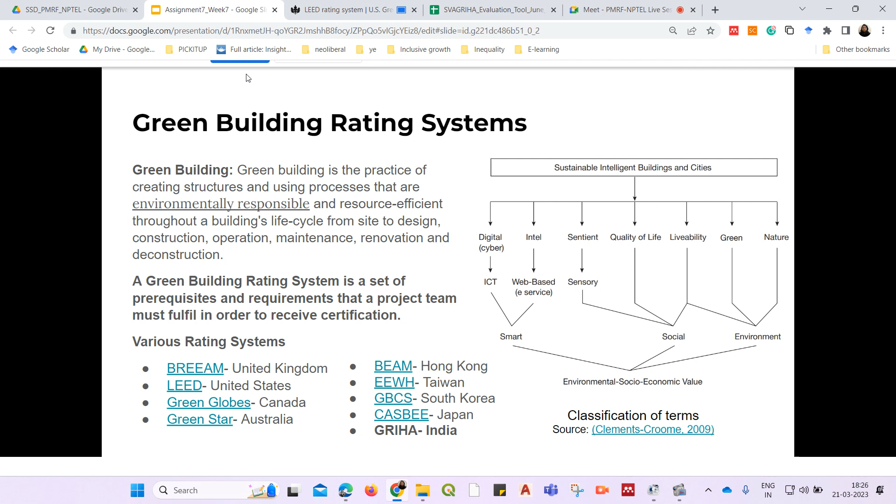Similarly, there is a link for Green Globes Canada, for Australia, Hong Kong, Taiwan, and other places which I have mentioned. Also, if you want to read more about how sustainability and different terms related to sustainability are classified, I have linked this classification of terms paper here, which is actually a book about intelligent buildings and how intelligent and energy efficient and different terms are classified. If you want to read more about that, you can go ahead and visit this link as well.

Okay, coming back. As I said, there are several different rating systems around the world used by different countries to suit their specific context. Today we are discussing, for this question, GRIHA, which is the Green Building Rating System for Indian context.

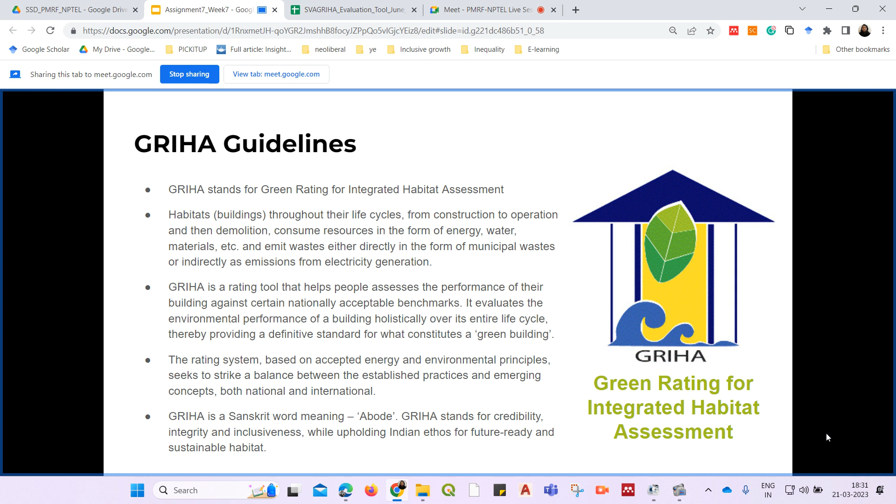Griha measures or evaluates the performance of a habitat, home, or building throughout its life cycle. It takes into account the different parts and components of that life cycle, and different components of the Griha rating, or indicators, correspond to different parts of the building's life cycle.

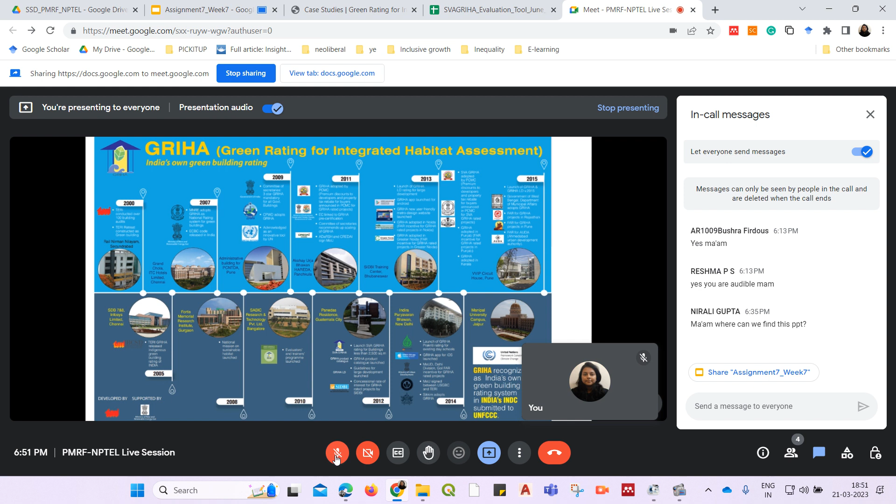Then the GRIHA project catalog was also launched, and guidelines for large development, even larger development, were also launched.

Then in 2019, the GRIHA LD rating for large development was also launched, and another app was also launched for Android, providing a more user-friendly way of interacting with the rating. A new website was also launched for GRIHA. The same year, GRIHA was adopted for FAR incentive generation in Noida and Greater Noida.

Then in 2014, GRIHA Prakriti rating was introduced for day schools, and an app for iOS was also launched. MOUD also provided incentives based on GRIHA rating for FAR in different projects. An MOU was also signed between USGBC and TERI for furthering GRIHA rating, and the state of Sikkim adopted GRIHA in 2014.

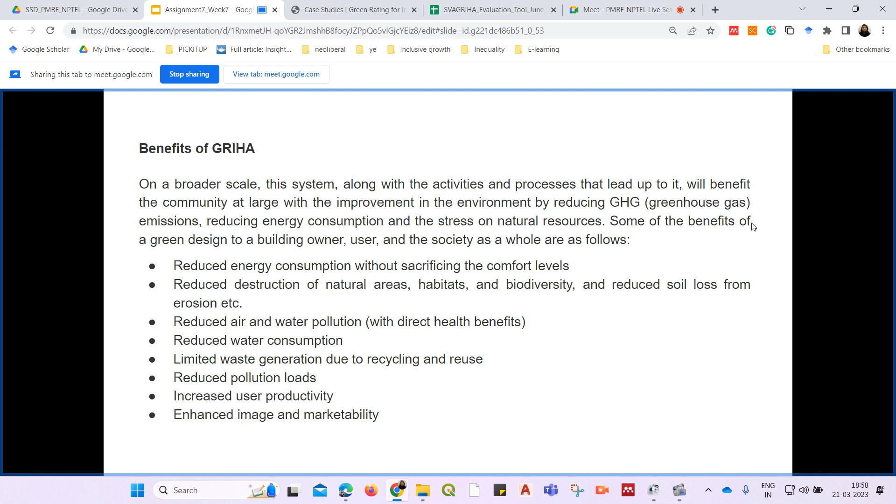I hope the background of GRIHA is clear, and we can move on to our question now. Coming back to the question, it was basically to analyze and score your residence as per the GRIHA guidelines. This is the link that was provided in the question.

This link takes you to the GRIHA checklists which are on their website. As you can see, there is a checklist for affordable housing, for existing buildings, and feasibility checklists — the latest 2019 one and the older one. Then there are self-evaluation checklists, checklists for day schools and for larger developments, one for SVAGRIHA which is the self-evaluation checklist, and then GRIHA for cities, which is a city self-evaluation checklist.

Since we are doing a small project for this example, not a larger project, we will follow the SVAGRIHA self-evaluation checklist, which was introduced for projects with a smaller built-up area or smaller site area compared to other projects. If you click this link, an Excel sheet will be downloaded which contains the checklist.

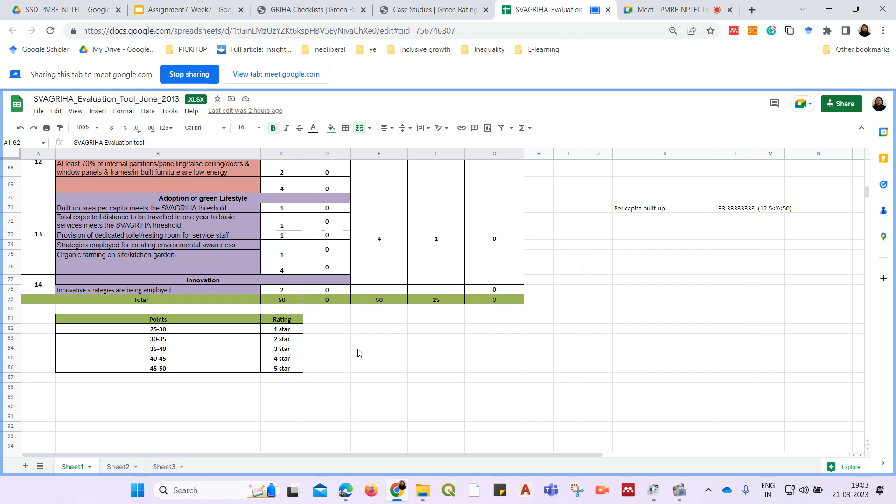So this is what the checklist will look like. I hope everyone can see. A checklist like this with the SVAGRIHA evaluation tool will be downloaded for you, and it will have different criteria. For every criteria the maximum points that can be awarded will be given, and category-wise point distribution will also be given. For each criteria, what is to be measured and how it is to be measured will be given.

Apart from this, another thing you need is the GRIHA manuals. I'll be sharing this Excel sheet with you, and I think it is already uploaded on the shared folder, so you can check that in your own time. But for now, let me just show you. This is the link for the GRIHA manuals which I have provided here.

If you just go on to the link, you will see different manuals which are there, like the manual for affordable housing, the existing building manual, the day school manual, and all such manuals are there. So we are working with the SVAGRIHA evaluation, so we'll open that manual for now. This is the SVAGRIHA manual.

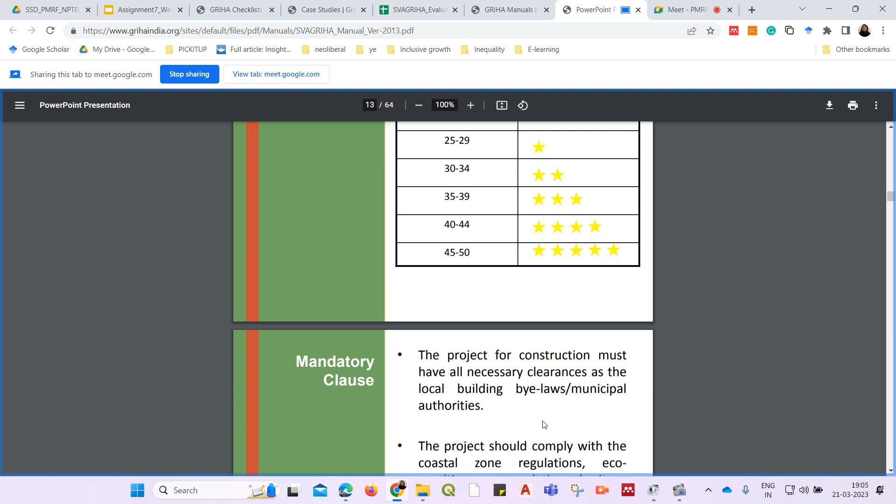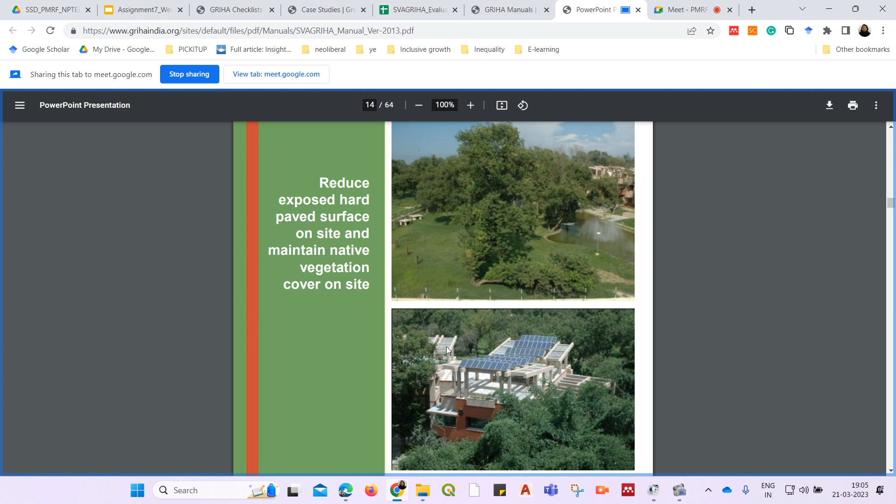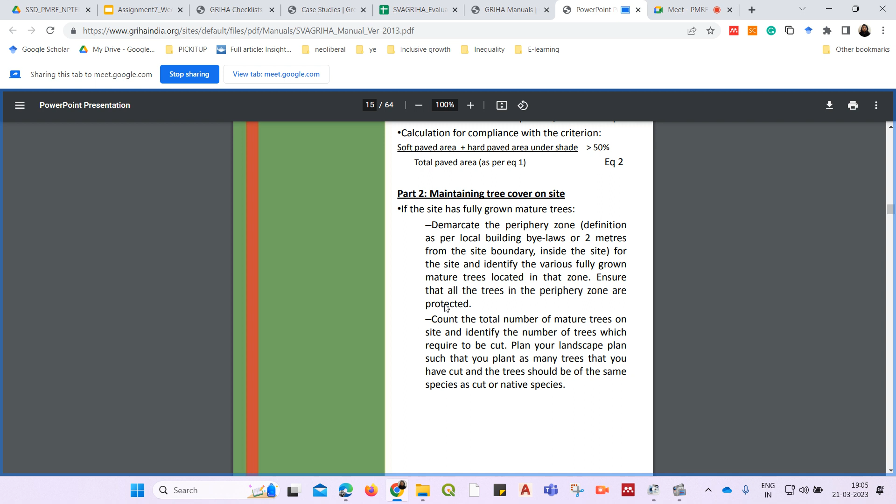As you can see, it provides you details about different criteria of the rating system. You can see different criteria, how much point each criteria contains, the point distribution, and further how much points will give you which rating. Then it explains each of the criteria in detail, what you need to consider for each part of the criteria, how you need to make the calculations related to each component. I hope that is clear.

Coming back to our evaluation tool, this is the example which I will be considering to explain to you this evaluation tool, or how it can be used. I have taken just an example of a residential building.

You can see this residential building which is located on this site, and this is the building, and this is the paved area around the building, and the vegetation on the site. The building is located in Allahabad. It has a site area of 200 square meters with a building footprint of 100 square meters. Apart from that, there is a paved area on the site of 25 square meters, and the built-up area of the building is 200 square meters.

The building also has a number of mature trees on the site before construction, which have all been protected during construction. The number of mature trees before construction were 10, and all 10 of them have been protected. There are some details about the area of fenestration on different facades of the building, and this building is for 6 residents, so the occupant number is 6. The building also has an installed capacity for solar water heater for 500 liters. So this is the example we are considering for our study.

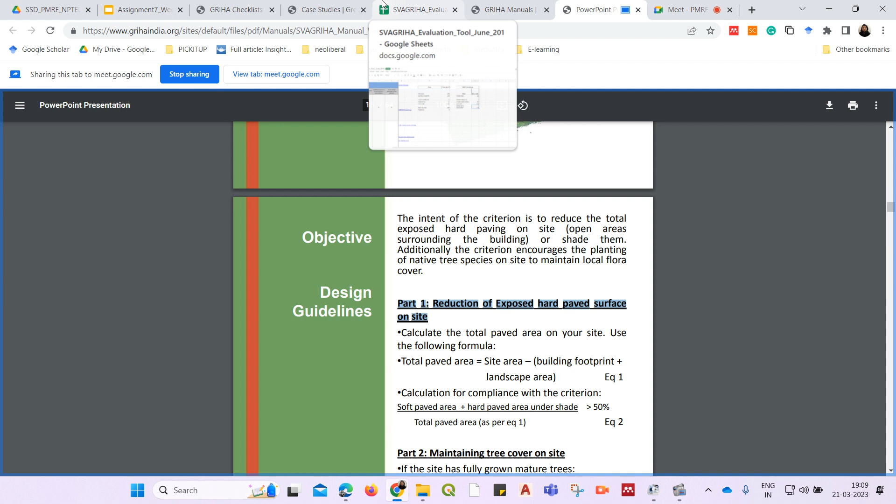So you can see here, part 1 is the reduction of exposed hard paved surface on the site. This has the same criteria for compliance: total soft paved area plus hard paved area divided by the total paved area should be greater than 50%. That means the ratio of soft paved area and hard paved area under shade, compared to the total paved area on the site, should be greater than 50% — more than half of the paved area on the site should be either soft or under shade.

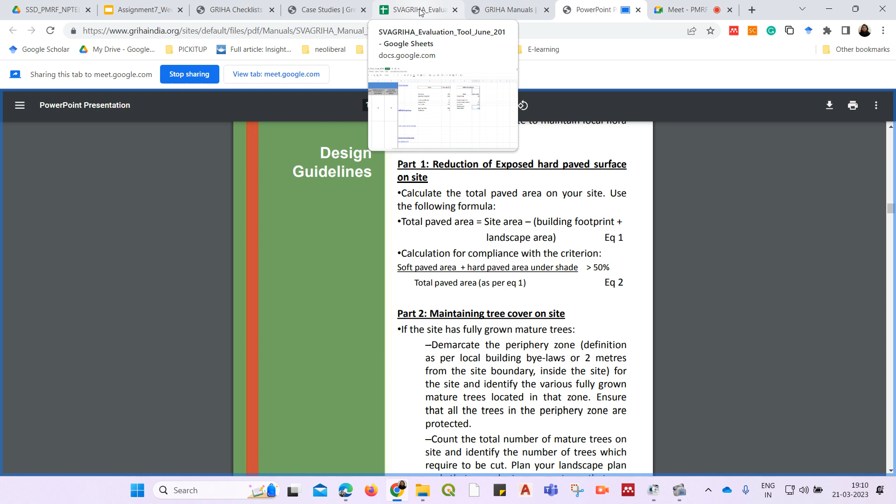So we'll make this calculation. If you can see the formula here: soft paved area, which is O5, plus hard paved area that is shaded, which is O6. So O5 plus O6, divided by O4, which is the total paved area. This comes out to be 0.4, which is 40%.

So the total soft paved area and shaded paved area is only 40% of the total paved area on the site. Seeing this rating, it is not 50% or more — it is only 40%. So we do not get these points.

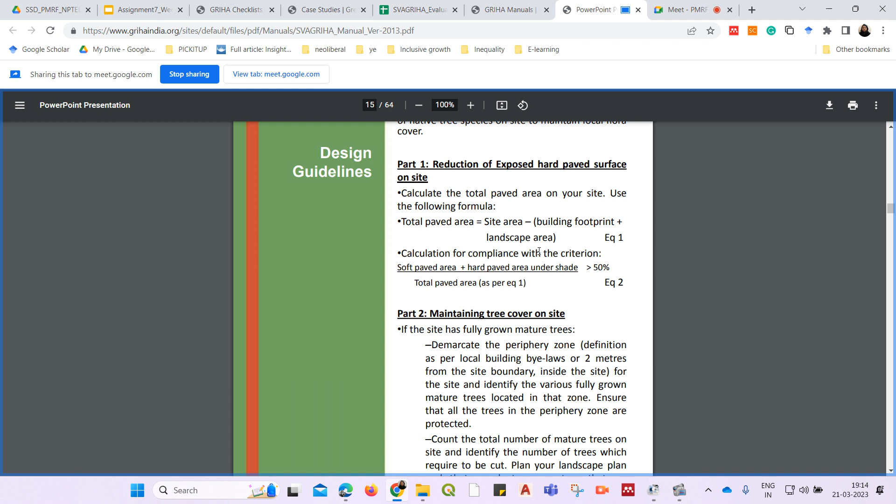You need to see if those trees lie on the perimeter of your site, or within your site. For different positions of the tree, there are different criteria for evaluation. So it is important to see how they define the perimeter, so you can judge if the tree is lying on the perimeter of your building or within your site.

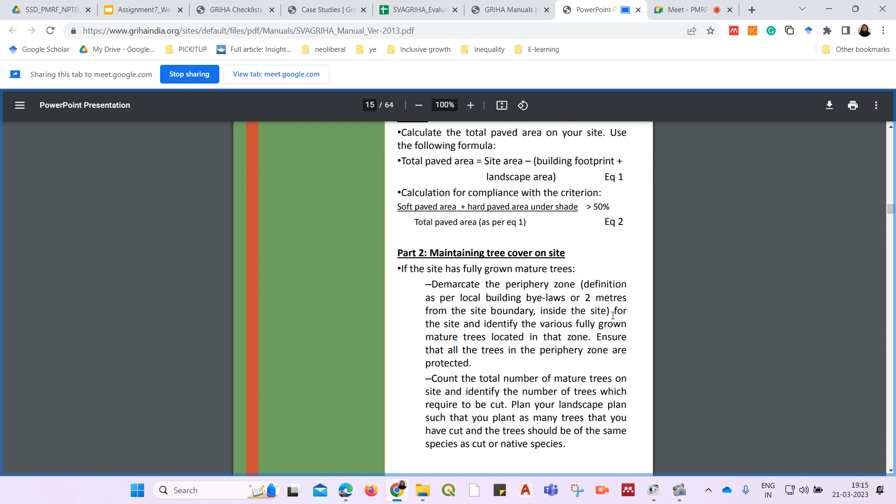So you can see from here, they have provided that you demarcate the periphery zone as per the local building bylaws, or you can demarcate the periphery as 2 meters from the site boundary. So if you just take a 2 meter offset from the site boundary, you will get the periphery of your site, and then you will know which trees lie within the periphery zone and which lie within your site. All the trees which lie in the periphery zone should be protected in order for you to get this 1 point.

So because we have protected all the trees, we are giving ourselves 1 point for this. The next is whether the total number of mature trees on the site before and after construction are the same. This is also yes, because before and after construction we have not cut any of the trees. We have retained all of the trees which were there before the construction, so we can give 2 points for that as well.

Then next is whether all new trees being planted on the site are native to the region. We will give ourselves 0 here because we have not planted any new trees on our site.

This is the criteria that no mature trees exist on the site, so we can just leave that because our site has mature trees.

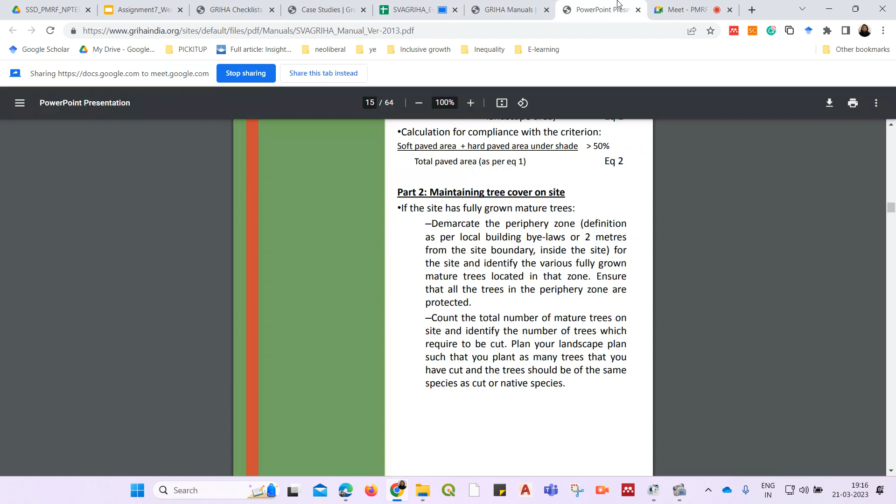Another thing to pay attention to is that if your building or project has cut some trees on your site, there are guidelines so that you can plant more trees than what you have cut, and then you can get more points for being green in your project.

You can see here they have mentioned that you should plan your landscape such that you plant as many trees as you have cut, and the trees should be of the same species as cut or native species. So even if project concerns force you to cut some trees, instead you can plant more trees of the same species as the ones you cut, or species native to that area. That can help you better your green ratings.

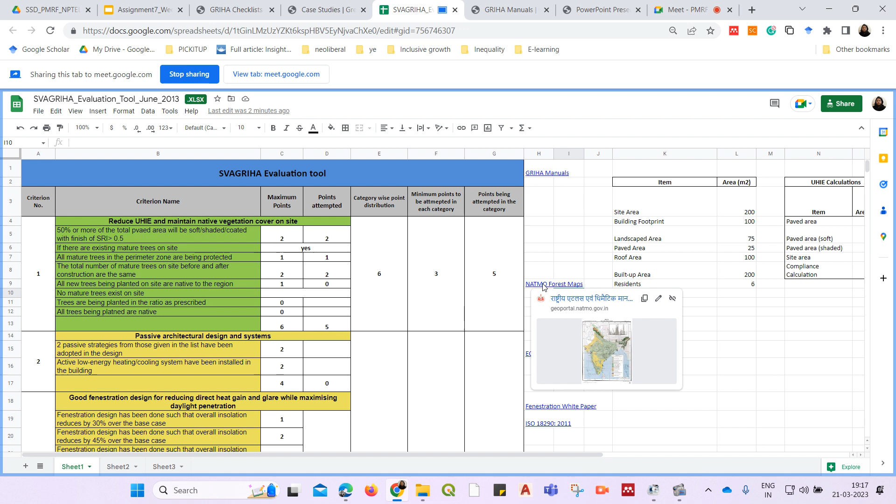So the question comes, how do you see which species are actually native to your area? For that you can follow trusted guidelines or trusted sources of what vegetation is native to which area, and use those guidelines to see which trees can be planted on your site. I have provided a reference: this is the link to the National Atlas and Thematic Mapping Organization, or NATMO.

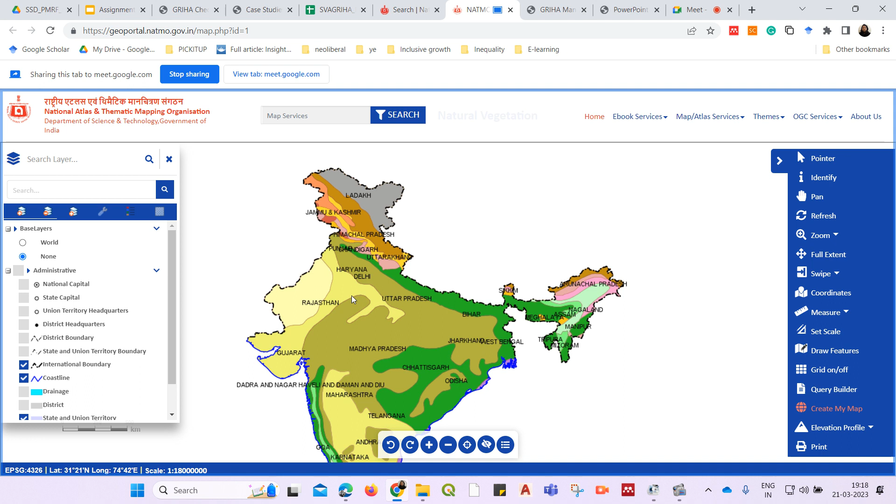These are their maps for natural vegetation in India. You can see here, this is a map of India showing natural vegetation, and you can see which kind of vegetation exists in which area.

Similarly, you can see these kinds of maps. You won't probably get very accurate estimates for each city, but for larger cities you can get an estimate from this kind of map as well. You can see what kind of tropical, subtropical, or evergreen vegetation is native to which area, and accordingly make choices.

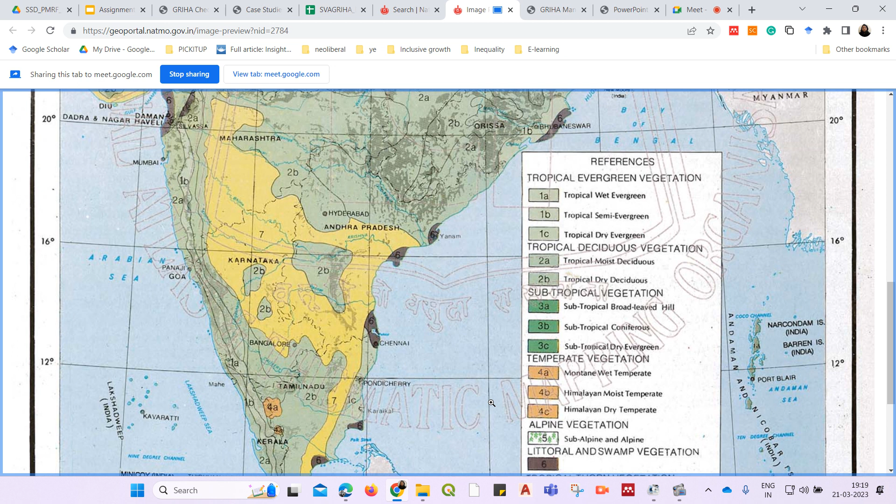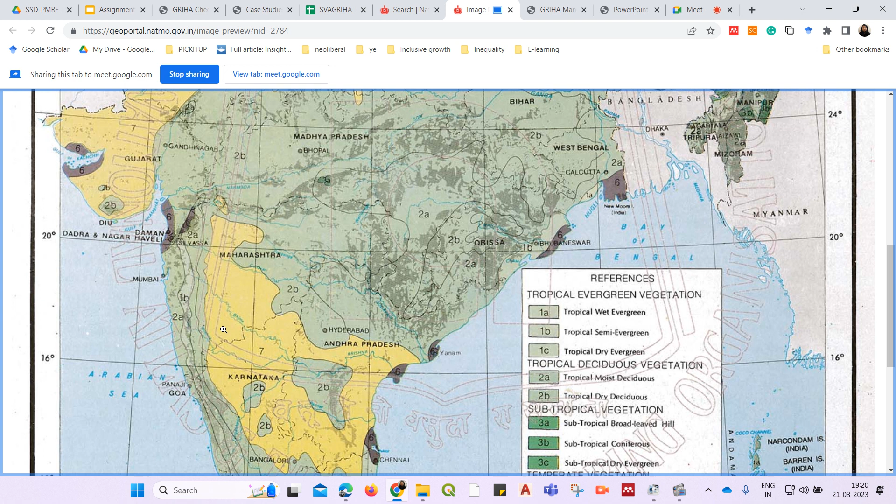You can see which tree species belong to a specific vegetation type. For example, if we are planting for Allahabad, which is in Uttar Pradesh, we look at this category, 2A, which is tropical moist deciduous forest, or tropical deciduous vegetation. We look for trees which fall into this category or belong to a native species of this type, and then select the appropriate species suitable for planting in Allahabad based on this vegetation type.

Similarly, you can find the forest types for specific parts of India, such as central India or western India. For example, this is for central India. You can see it has been divided into tropical semi-evergreen forest, tropical moist deciduous forest, littoral and swamp forest, tropical dry deciduous forest, thorn forests, and broad-leaved hill forests. You can zoom in and even see cities and smaller towns here, and see which kind of forest or vegetation is native to that area.

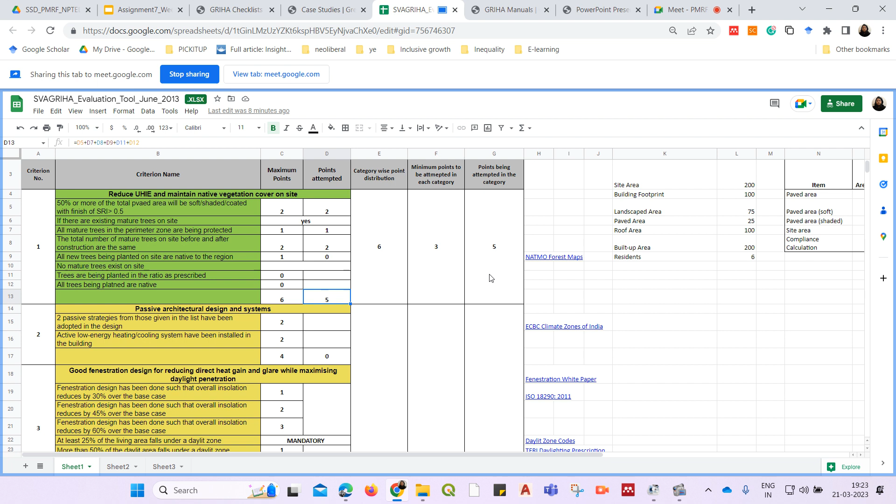So you saw here also, the highest category point which we can get here is 6, and the minimum points which need to be attempted in this category to get the certification is 3, and we have gotten 5. So this way the points get logged into each category.

Then the second criteria is passive architectural design systems. So let's go back to the manual.

Based on the site area, they have defined how many fully grown mature trees are to be planted on site for you to get the extra point in certification. If your site is less than 250 square meters, you need to plant two more trees. If it lies between 250 and 750 square meters, you need to plant three more trees. And if the site area is greater than 750 square meters, you need three plus one tree, the plus one for every extra 250 square meters in your site.

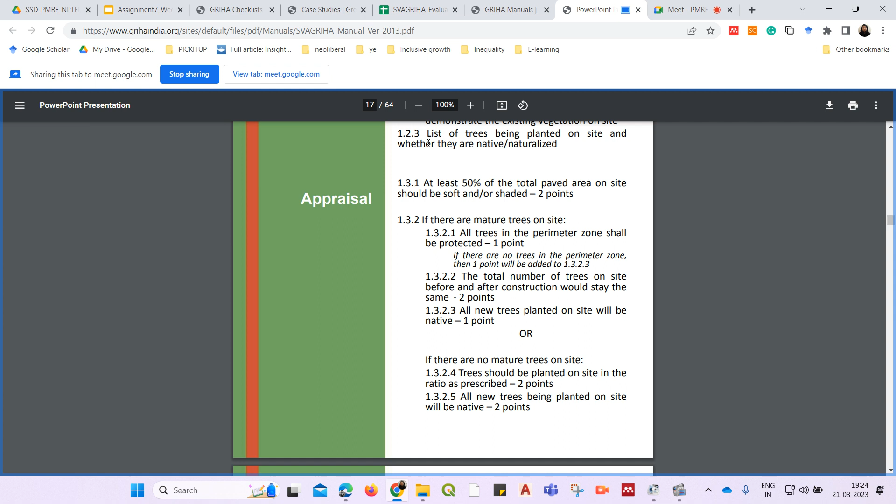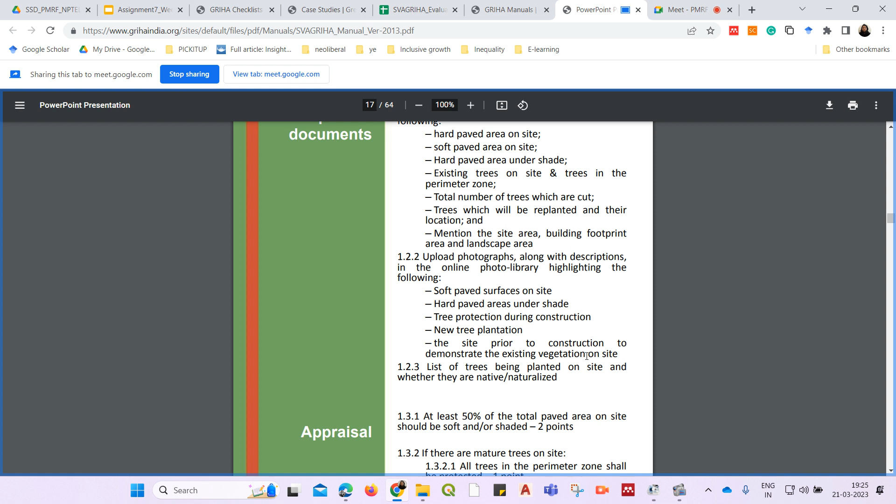There are several other criteria pertaining to your specific residence which you are evaluating. I am evaluating for my residence, and because we have not planted any more trees, I have just left this. If your case involves planting more trees, you can further read this description to see how to evaluate that.

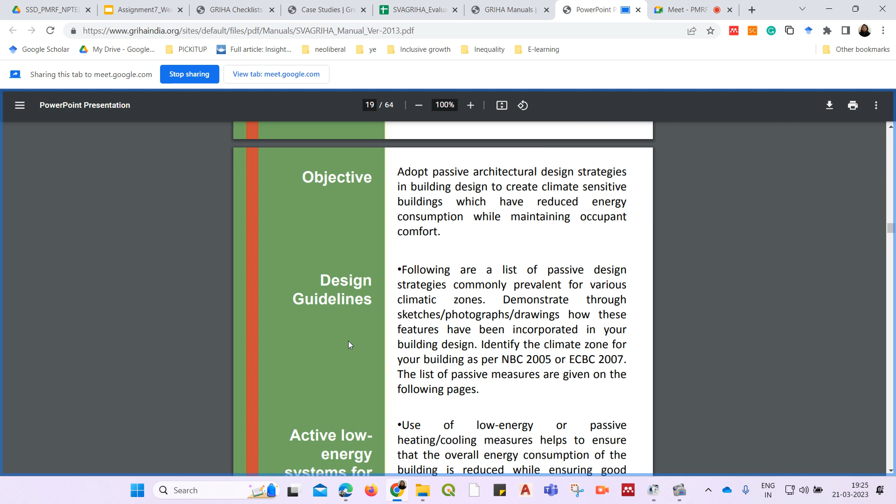Next criteria is adoption of passive architectural design strategies in your building. There are two categories here: first is two passive strategies from those given in the list that have been adopted in our design, and the second is active low energy heating or cooling systems that have been installed in the building. So let's go back.

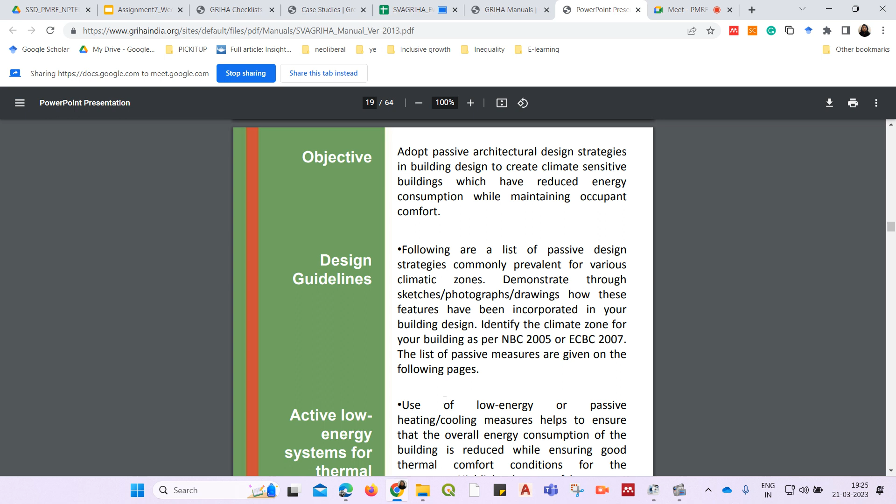Examples of low energy or passive heating cooling measures include things like desert coolers and fans, earth air tunnels, passive downdraft evaporative cooling systems, direct and indirect evaporative cooling, solarium, and Trombe wall.

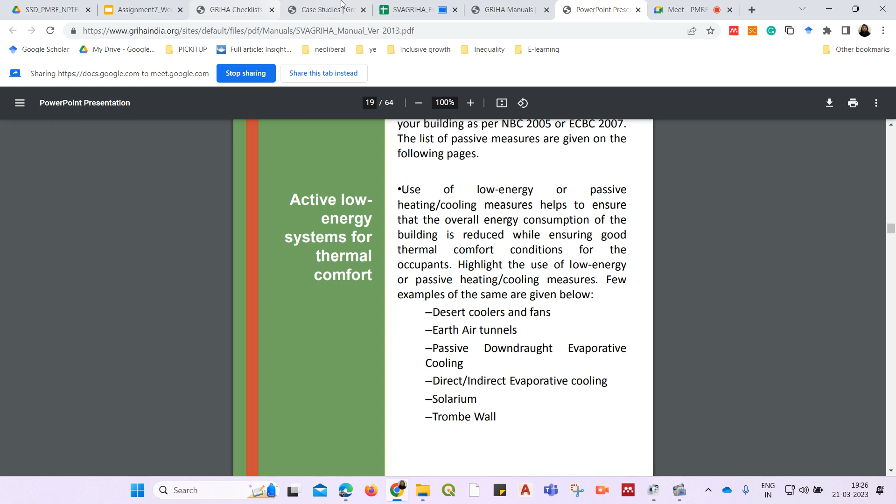In my example, there is a water body in the back of the building, and this water body along with the surrounding vegetation contributes to passive evaporative cooling. Among these categories, indirect evaporative cooling is the one incorporated in the design. Apart from that, desert coolers and fans are also part of the building, so these have been employed as well.

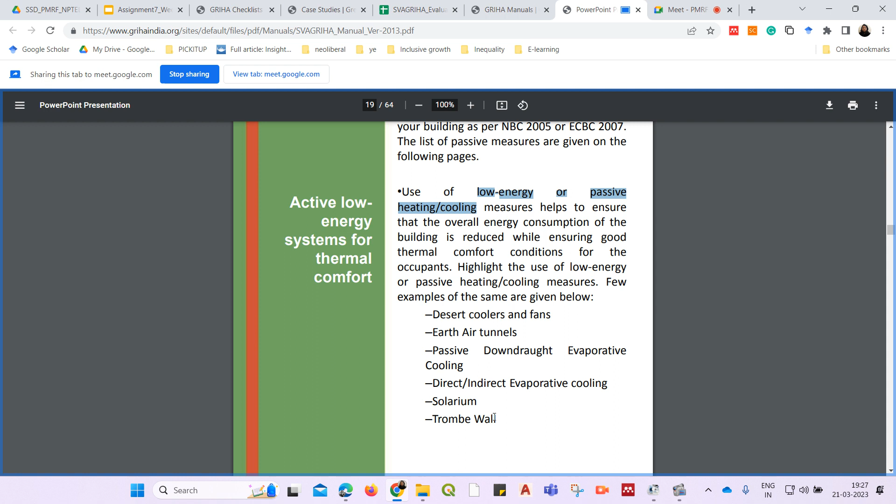So two of these low energy or passive heating cooling measures have been incorporated in my building. I think my example qualifies for the active low energy heating cooling system points, so I am awarding 2 points for that, plus points for two passive strategies.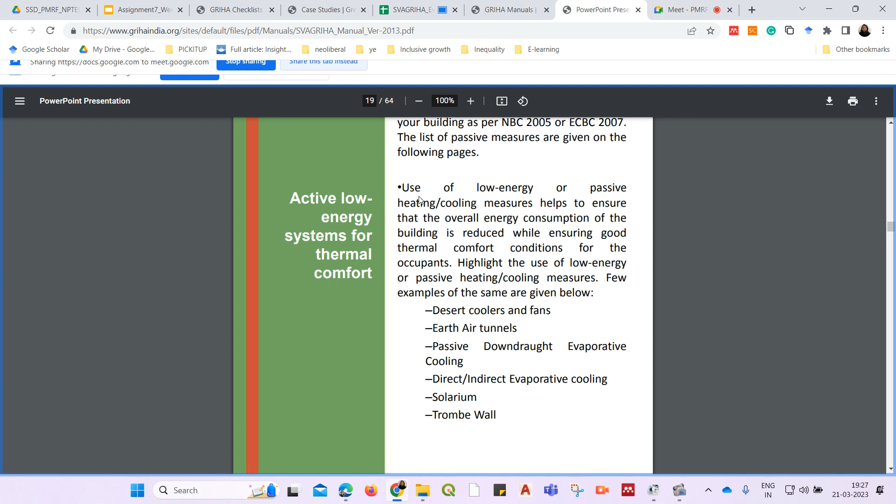Going back again, we see these passive design measures are based on the different climate your building lies in. There is composite climate, cold climate, techniques for warm and humid, for moderate, hot and dry, etc. So to award myself points, I first have to see which climate the building lies in, and whether it follows the specific passive strategies for that climate.

To see which climate my building lies in, we have to first follow a national guideline. So for that, we'll follow the ECBC, the Energy Conservation Building Code, which you would have also studied this week. So we'll just go to annexure E.

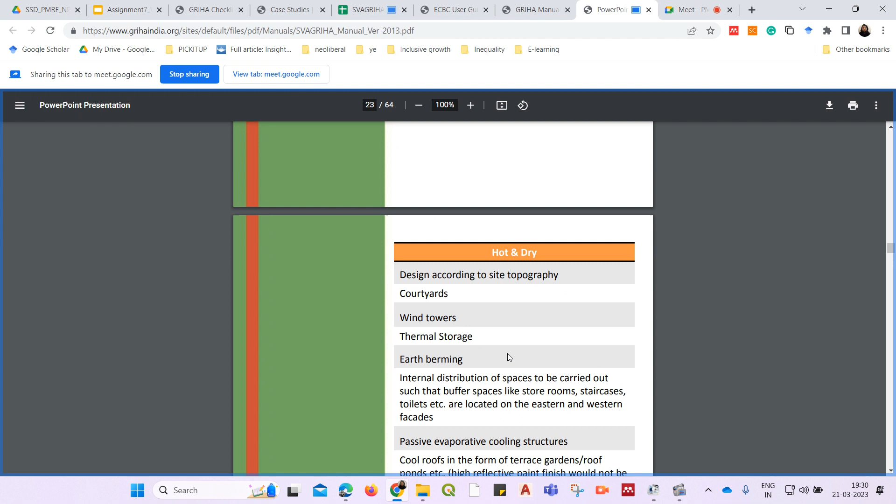Coming back, we need to see if our building incorporates some of the passive techniques suitable for the composite zone. So looking at the different techniques for composite zone: first is solar chimney or wind tower, no, our case doesn't have that. Courtyard, also no. Water bodies for evaporation, yes, our building has that.

Reduced solar access, you can see that our building has a lot of large shading devices, shades which have been extended so that the building gets reduced solar intake.

And this is there on the south side. You can see this is the building's north. It is there in the south and east side. So it is important to shade the west and south side of the building. West is not very shaded, but the south side is properly shaded. So we can still consider that yes, there is some reduced solar access.

Then is the building or site planned in a way to increase cross ventilation or layout from windows, etc. Sorry, just give me one moment.

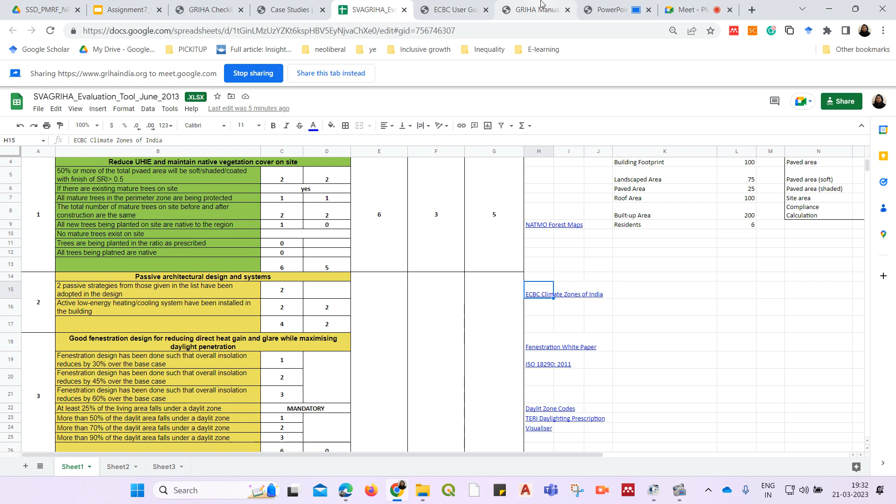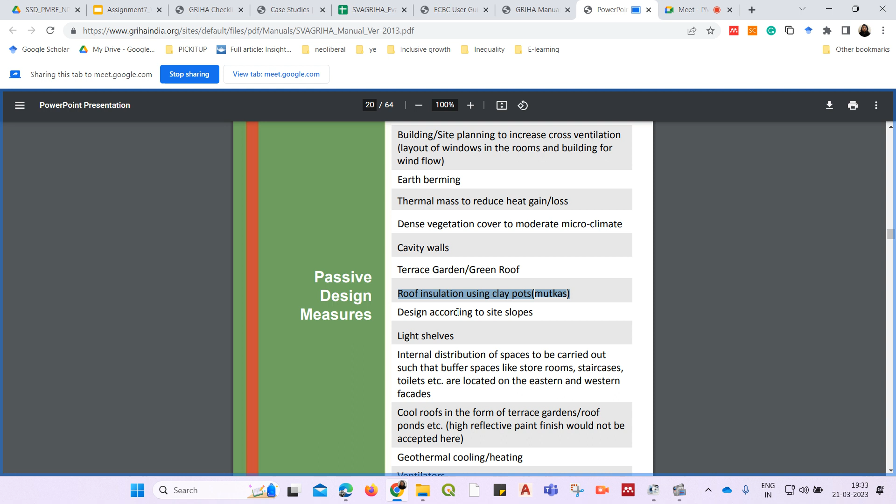Coming back. Okay, so there is no specific planning on our side for increased cross ventilation, so we can disregard that. Also, our site doesn't have any earth berming or thermal mass to reduce heat gain or heat loss. We have some vegetation, but we don't have dense vegetation to moderate the microclimate, so no, we cannot say that either. We also do not have any cavity walls or green roof. We also don't have any roof insulation. There are no slopes on our site, it is a flat lying site, so we can't consider that even.

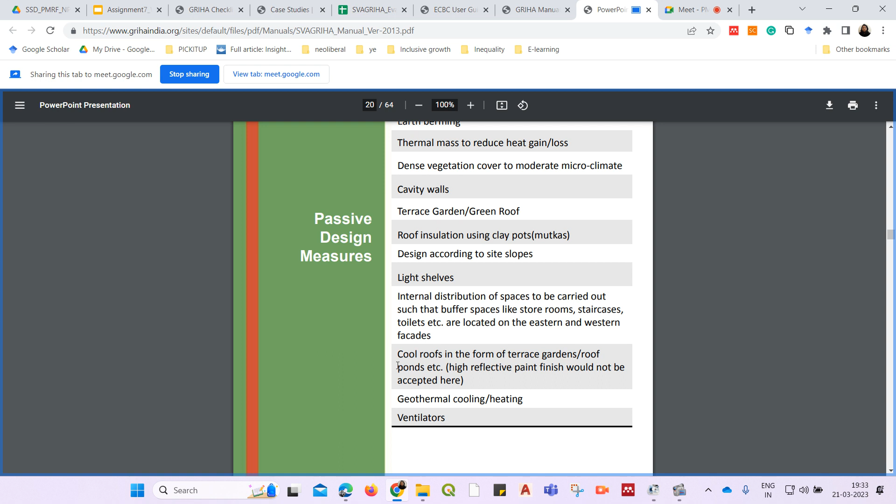And none of these also have been provided, although we have a pond or water body for evaporation which is there. So this we can say is the only passive cooling or passive design technique which is there, apart from reduced solar access on the south side of the building. So seeing this, I think we can award 2 points here as well.

Coming down to the next, which is good fenestration design for reducing direct heat gain and glare while maximizing daylight penetration. So for this, you need to calculate first of all your fenestration design and what overall insolation is being gained by the building, and they have provided a specific way of how this is to be calculated.

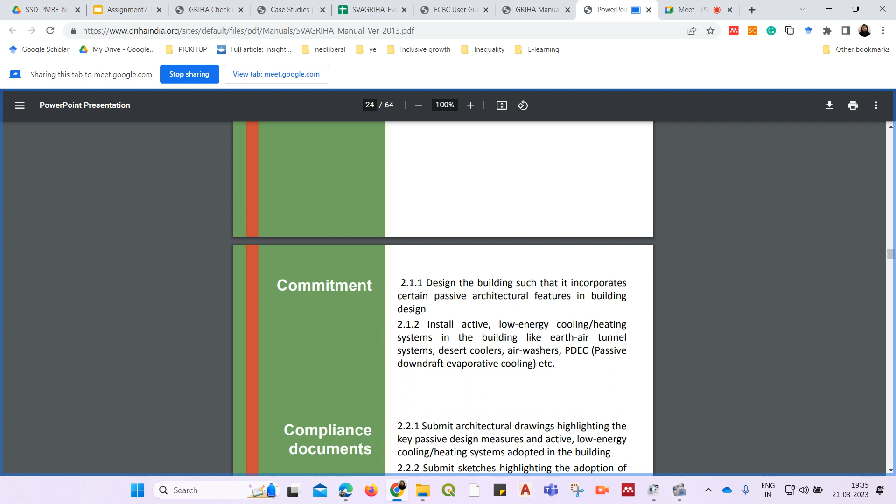You can also see here for the different design commitments you make for green building design in your self-evaluation, the different compliance documents you'll need to submit as part of this compliance report to get your rating have also been mentioned in this document. So for example, for getting this passive design technique, what you'll have to submit is architectural drawings related to the key passive design measures and active low energy cooling heating system adopted in the building. So the fan and desert cooler, the evaporative passive pond which is there, and the shading devices incorporated in the building as a method of passive cooling or heating technique. The specific architectural drawings of those elements have to be submitted as compliance documents to get this rating.

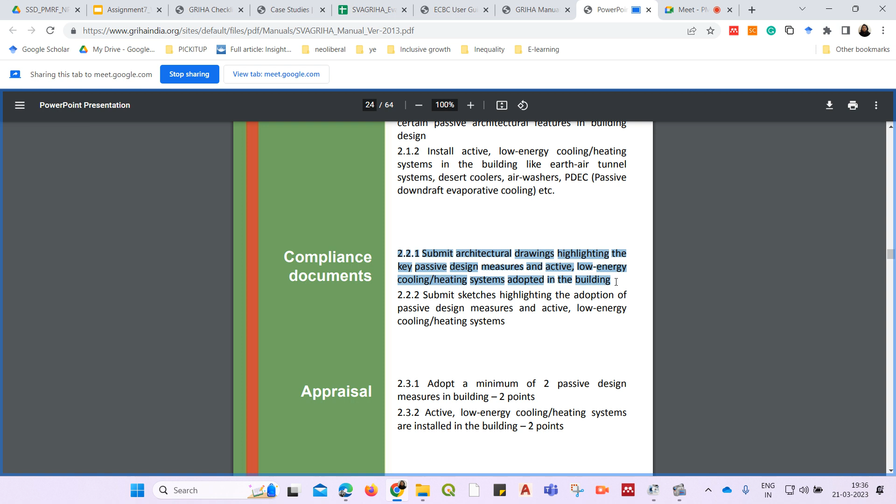It can even be sketches which highlight the adoption of passive design measures and active low energy cooling or heating system.

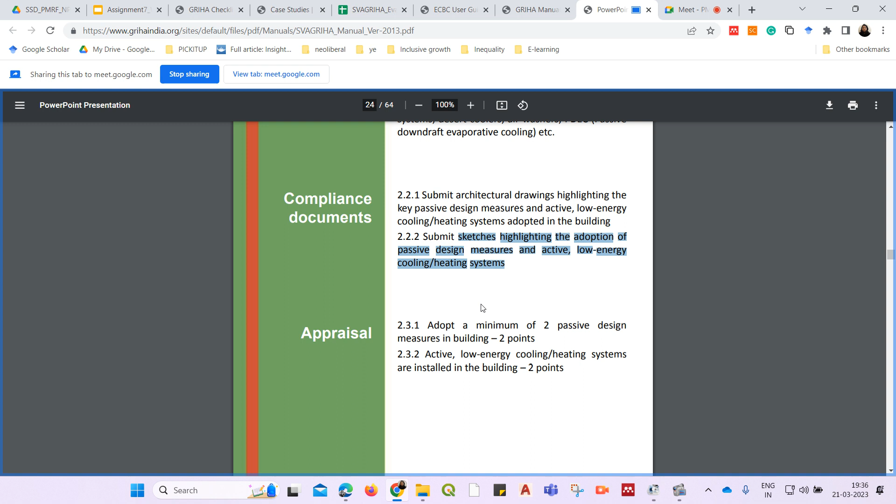Next is the fenestration design, which we were just considering. So they ask to calculate different things like the insolation based on the design case and the base case. In the design case, you enter the total window area on each facade according to the orientation of the facade, and this helps calculate the total direct insolation on the building through the fenestration. This is then compared with the base case, which is what your building actually has, and the base case is that all the facades have equal amount of fenestration. Then your design case is compared to the base case, and it is evaluated how much direct heat gain is coming through your fenestration compared to the base case.

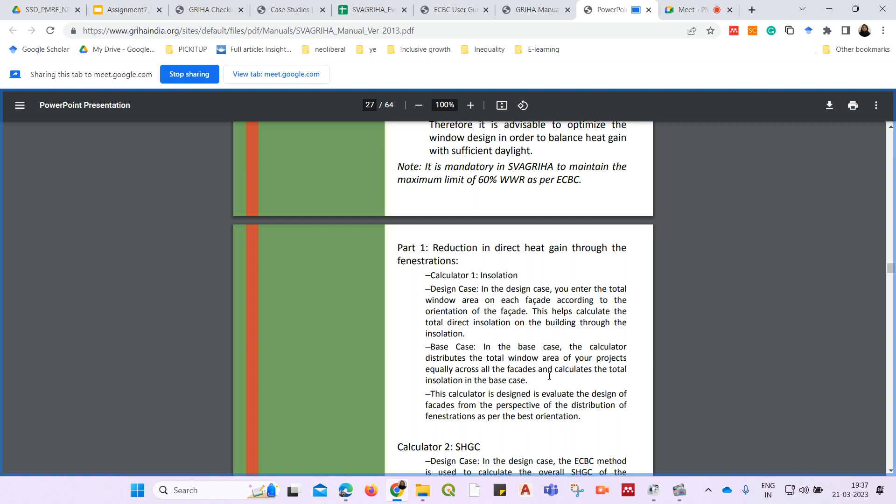And if heat reduction is taking place in case of a building which lies in a composite or hot climate, or more heat gain is taking place in case of a building which lies in an area of cold climate, similarly guidelines are provided for making these calculations.

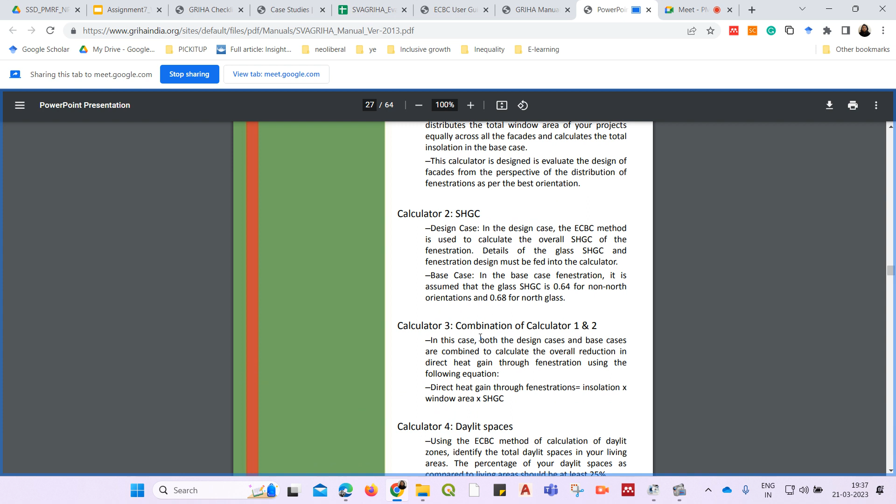Apart from that, even calculations for daylight which your building is getting are also provided. So direct heat gain through insolation, window area, solar heat gain coefficient, etc. is also provided, and they have also provided daylight factor percent of each of the dwelling area. Based on this, you can see which of your dwelling areas lie for that. Because we are focusing on residences, this will be the daylight factor percentage which we will be considering.

If you want to see what these calculations are based on, I have linked several studies. For example, this is a white paper for fenestration studies.

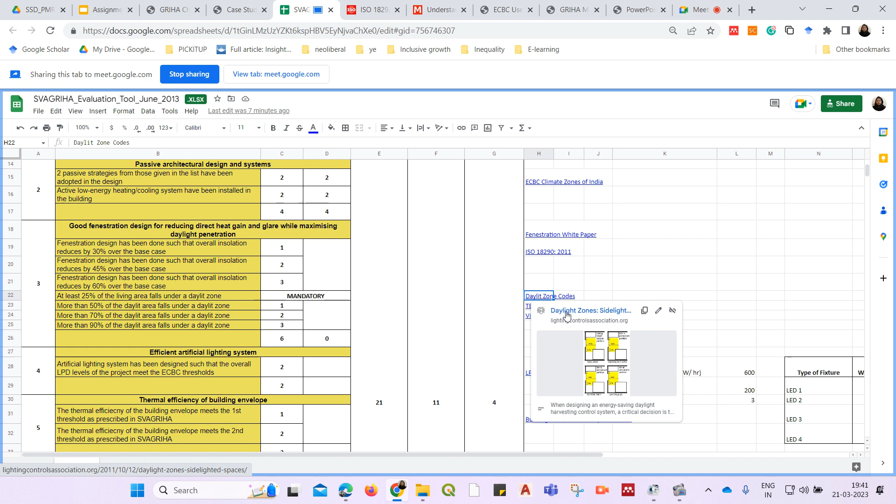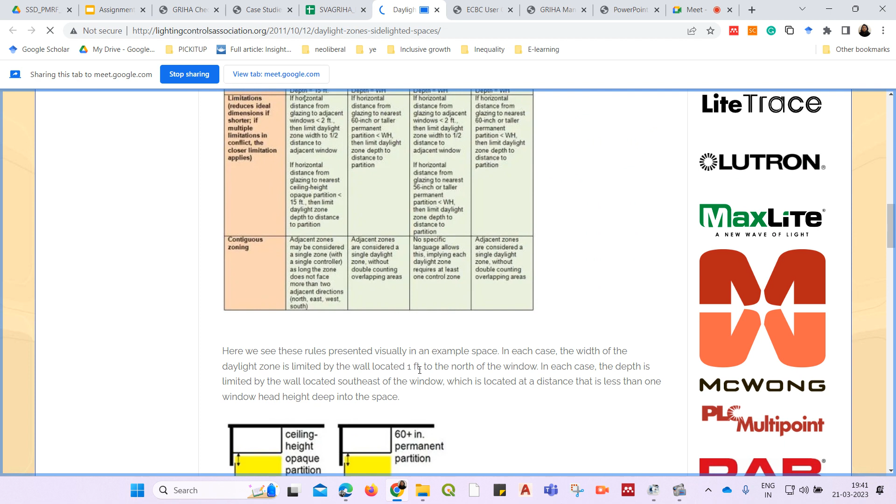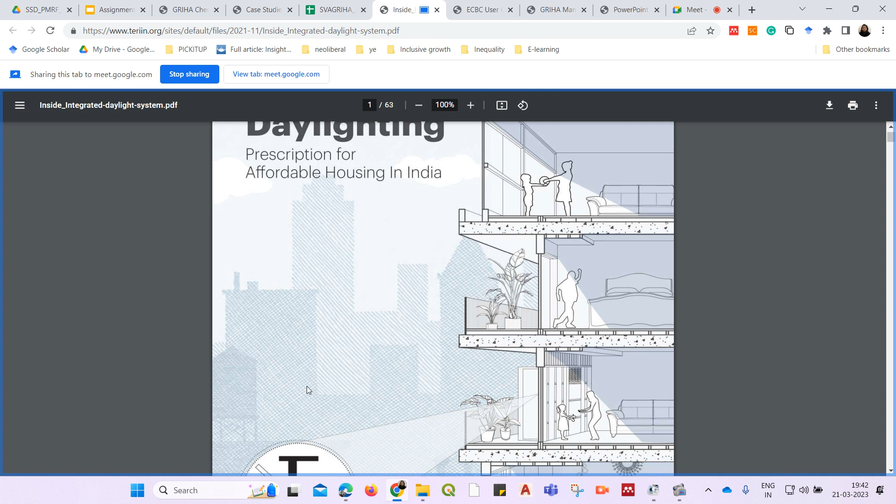Apart from that, there are even daylight zone codes. For example, this is for side-lit spaces, so there are energy code standards and guidelines for daylight which you can check for these calculations. Then there is TERI's guideline for daylighting prescription as well - TERI's daylighting prescription for affordable housing in India. These you can use to actually study how these calculations are made, what factors are considered when you calculate fenestration design, daylight, or insolation which the building is getting due to the particular fenestration in your building.

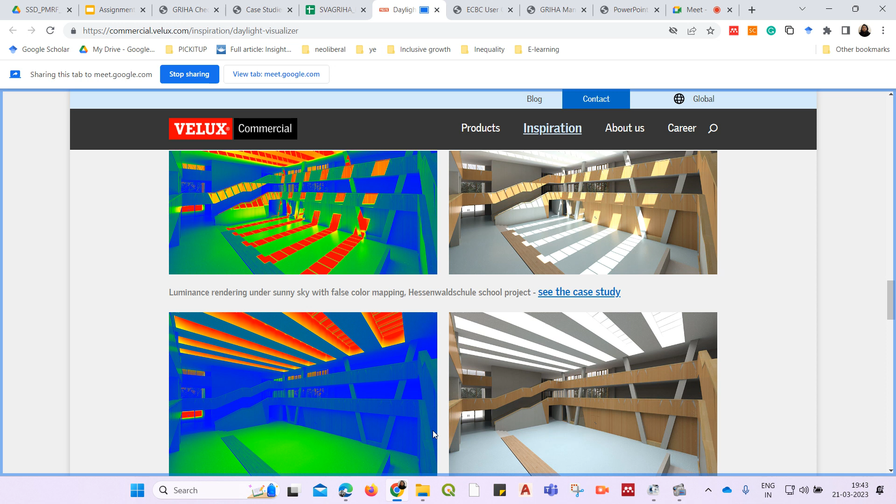Apart from that, there are even visualizing softwares which you can use. You can just enter your data, enter your plan, and visualize how daylight, solar insolation and illuminance are for your building in your particular climate. For example, this is one type of visualizing software called Velux Daylight Visualizer. It is a free software both for Mac and Windows, and it can provide simulations for daylighting and solar insolation in your building. So such kinds of things also you can use.

However, in the case of this SVAGRIHA evaluation tool, the manual asks you to make this calculation on your own. However, in their certification tool, you can directly enter the details about the location of your building, the climate, the area of fenestration on each wall, and details about your plan, and it will make these calculations on its own. So I won't be going into the details of how these calculations are made, nor is there time for the detailed calculation, but I hope I have provided you enough resources that you can make these calculations for your building.

For now, I'll just give arbitrary scores for the sake of this exercise. So we have given 2 for fenestration design and 1 for daylight. So we have gotten 3 out of 6.

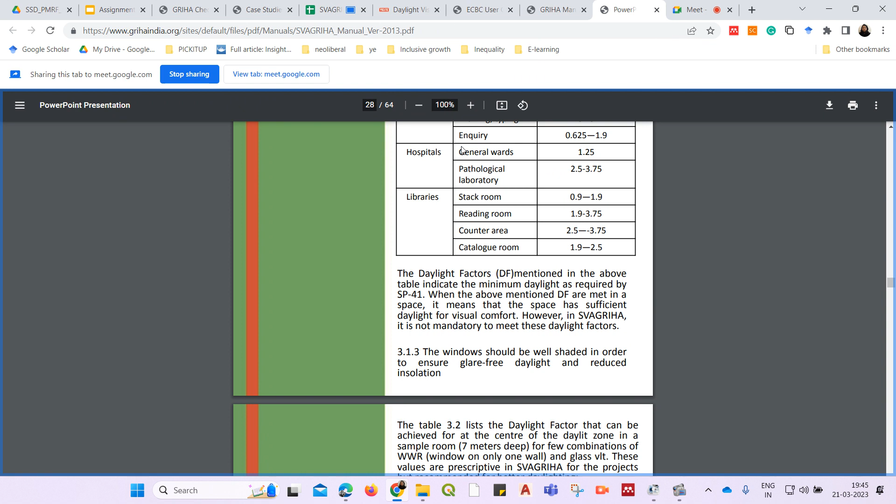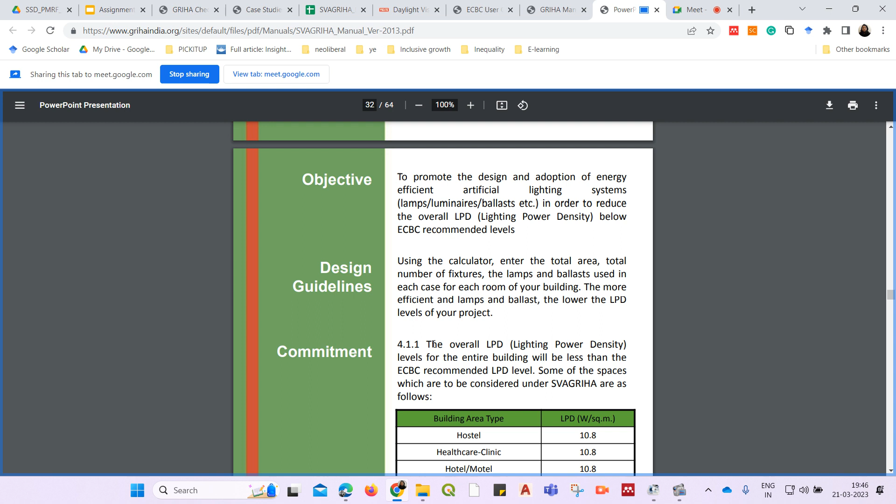Moving on to the next point, which is thermal efficiency of the building envelope. I think you already know what a building envelope is, it has been discussed several times in the previous lectures. So this criteria basically asks to see the thermal efficiency of the building envelope, and if it meets the threshold that has been prescribed in the SVAGRIHA guidelines.

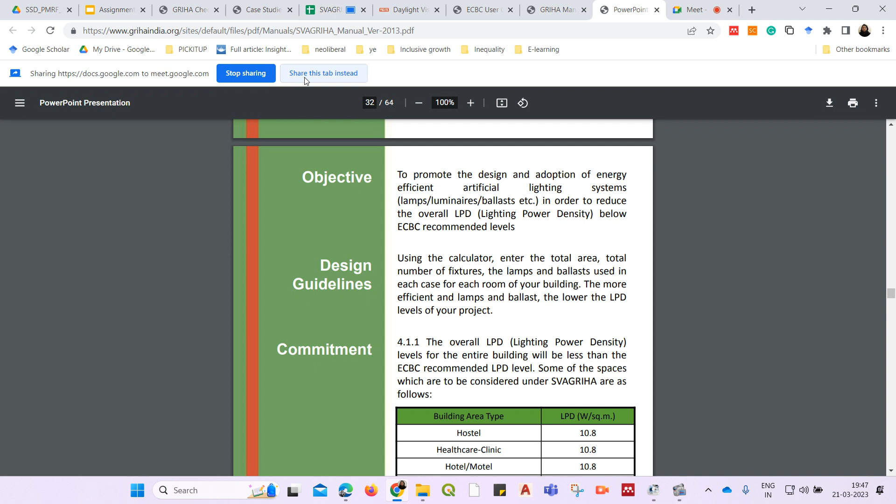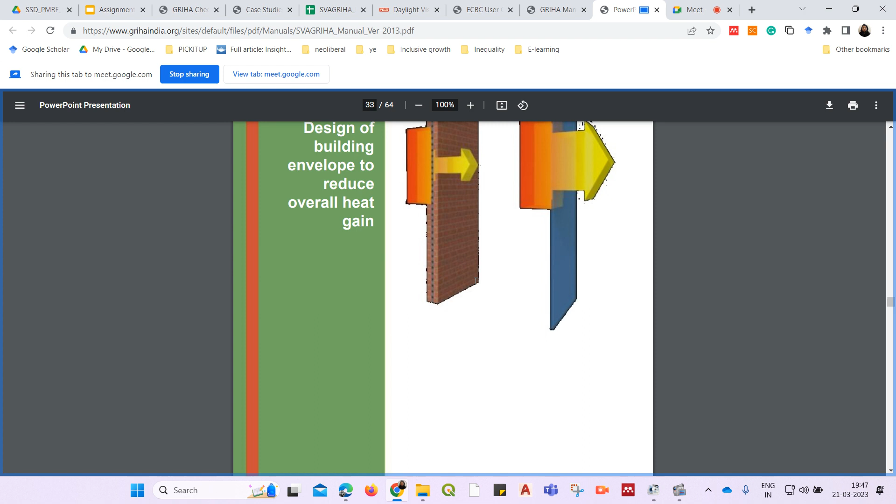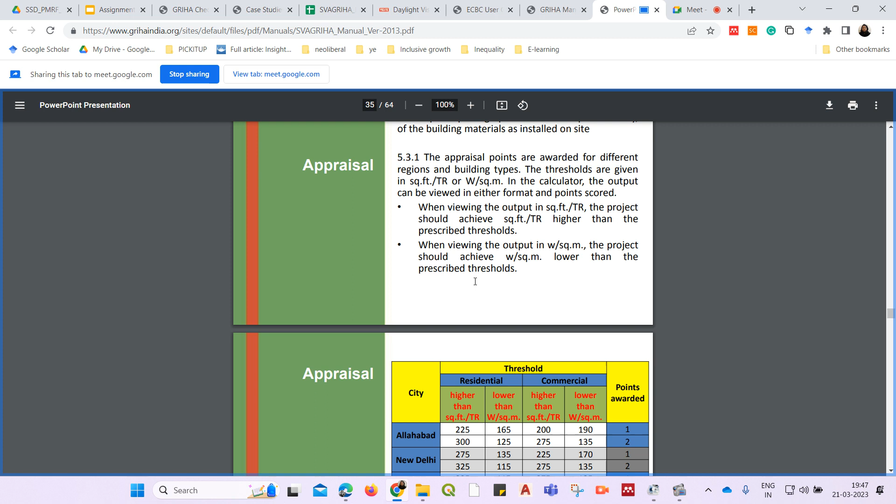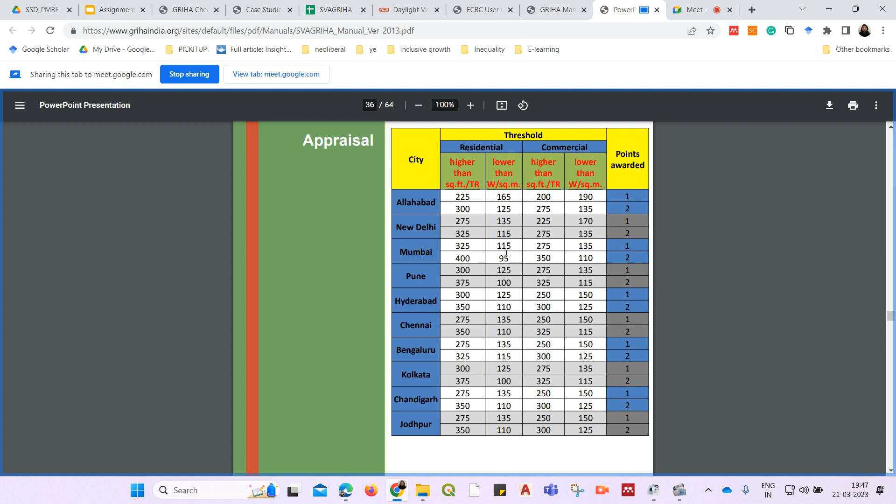So seeing this again, these are the appraisal points that have been prescribed for major cities, and then you can see there are points for different types of building, like for residential and commercial.

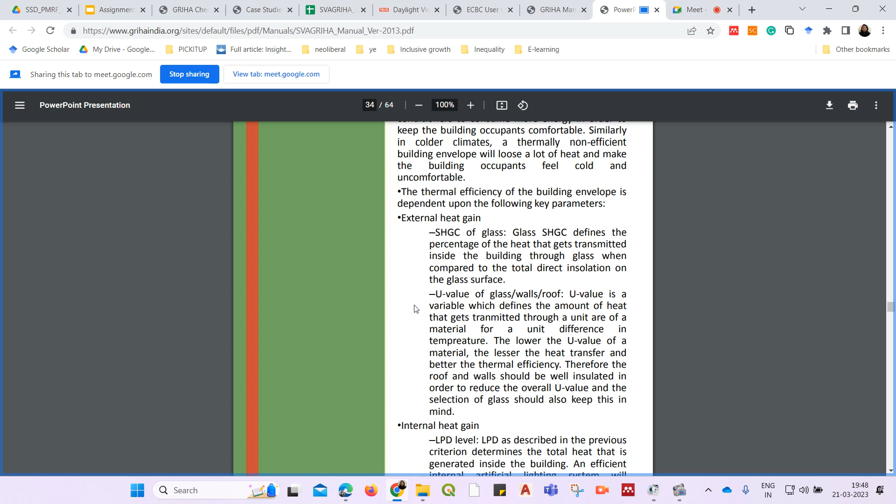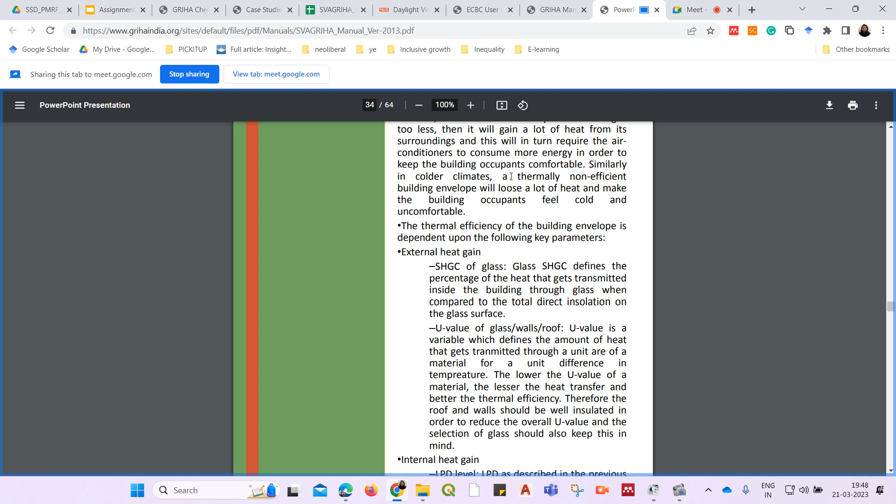You can see it tells you how to analyze different criteria. So if your building has fenestration or some treatment of the facade with glass, you have to take the SHGC of the glass into account, or U value of glass, walls or roof, to calculate the external heat gain into the building.

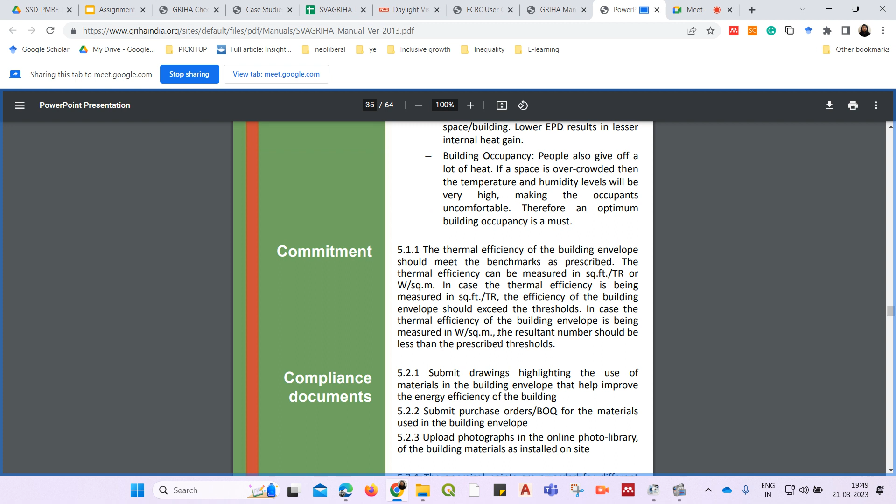And to calculate the internal heat gain, you need to consider how many residents are there, or the building occupancy, and the lighting system which generates heat, or the equipment power density - how many equipment are there and what amount of heat they are generating. So these things can be used to evaluate the thermal efficiency of the building.

I have provided you a link to see how thermal efficiency calculations for a building are made. There exist softwares for this which can help you do this, and even the tool for Griha, you can just enter the details about your building and it can calculate this for you. But if you want to see the background information on how the energy efficiency of your building envelope is calculated, for example considering the U values of different elements of the building envelope, you can see those calculations here.

Based on this, you can either make those calculations or see that for yourself, and award points to your building accordingly. I'll just award 2 here.

Then, use of energy efficient appliances - for example air conditioner, fan, geyser, water pumps, etc. Are they BEE 3-star labeled, 4-star labeled, or 5-star labeled? According to this, you can see the appliances in your building and award points for that also. So I'll award 2 points here.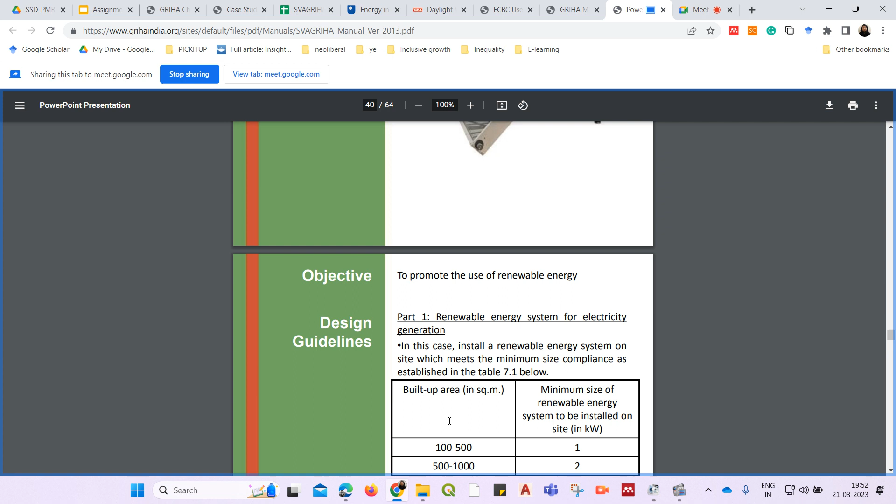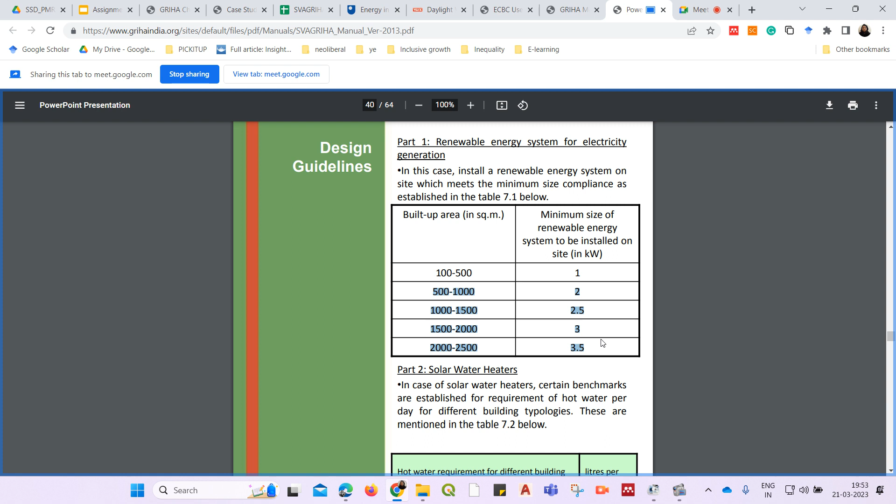You can see here, if your site or project has a renewable energy system installed, you can see what is the minimum size of renewable energy system which needs to be installed in your project or building to be counted for a point in the certification. So if your building is 100 to 500 square meters, you need a minimum 1 kilowatt of energy production installation, and moving to larger systems, you need larger energy output.

For solar water heater, based on the different type of building, you need different quantities of water per day. Because we are seeing a residential building here, we'll use 100 liters per day and make our calculations accordingly. It says that you should ensure 50% of the daily hot water requirement is met through the solar water heater, or 70%, and this is what is required.

So let's go back to our calculations and see here. The number of residents is 6 as we mentioned, and hot water per day per resident requirement is 100 liters. So total water requirement per day will be 600 liters. Coming back to our building, we can see that a 500 liter capacity solar water heater has been installed in the case of our building.

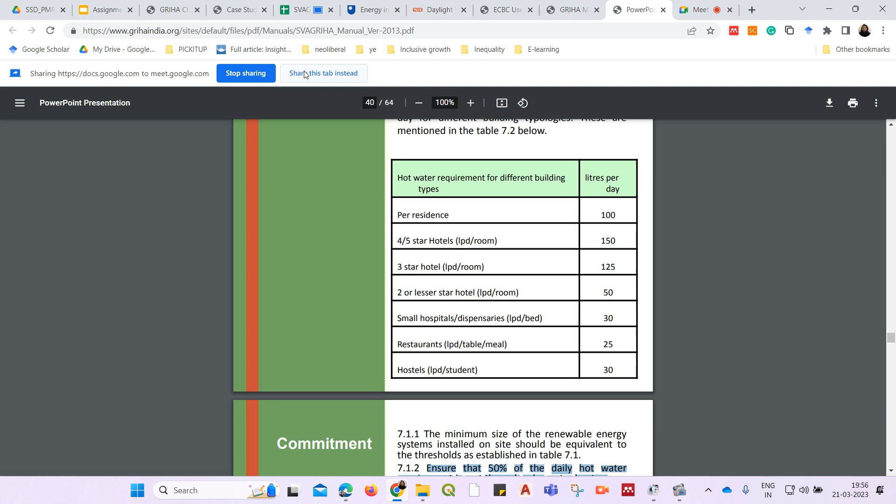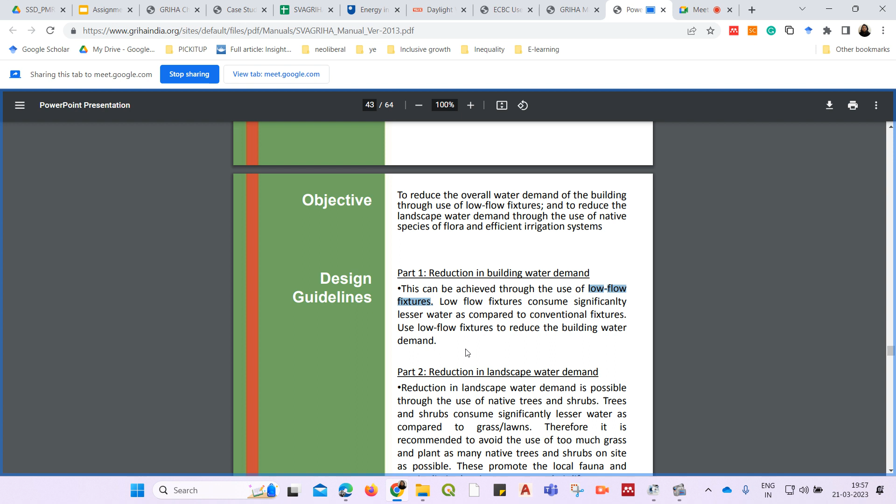Moving on to the next one, this is reduction in building landscape water demand. This again makes calculation based on a base case, and then how much you have reduced based on the base case. So if we see here, these calculations are made considering one base case with normal or base case fixtures, and then seeing if your building uses low flow fixtures which can reduce water use demand. If your building has such fixtures, how many fixtures are there and how much building water demand it has reduced compared to the base case, such calculations can be made based on that.

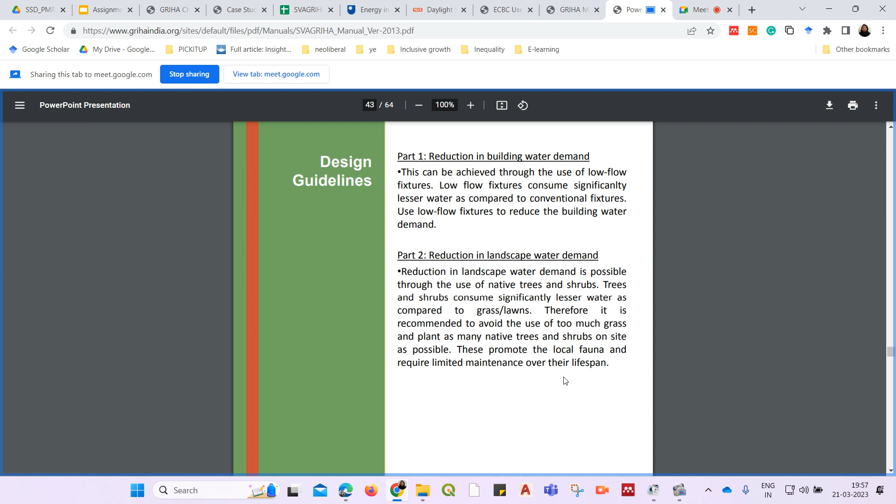And this is done for both. First is building water demand, so water within the building used by occupants, and then reduction in landscape water demand, for the landscaping in your building, the plants and everything, the water required for that. So low flow fixtures can be used for both, and accordingly calculations can be made.

I have provided several links. For example, this is linked to LEED's water use reduction calculation using low flow water fixtures. This is actually sort of a toolkit, Excel based. I'm not sure, my Excel is not working, so this will not open. But this is basically an Excel based toolkit which you can download from this website, and you can use that to make your calculations for water use reduction by the use of low flow fixtures.

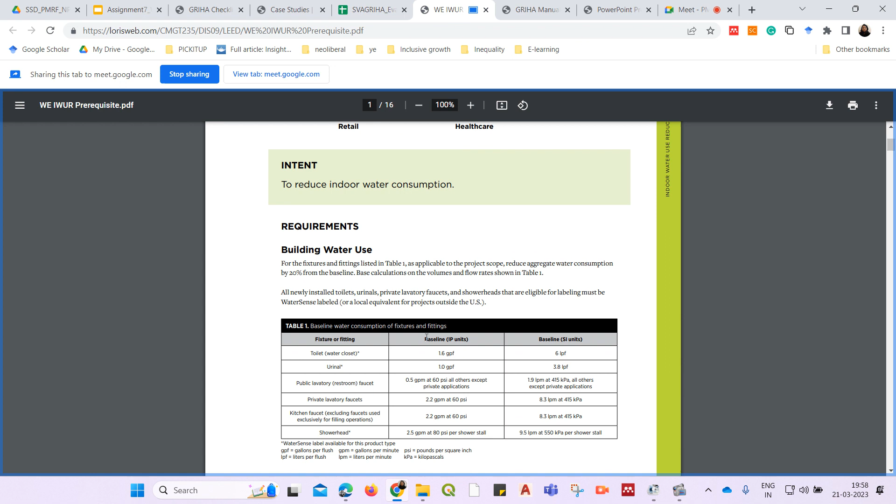Similarly, there is a study for indoor water efficiency. You can refer to this study as well. It tells you about different fittings or fixtures, gives you a baseline, and helps you calculate how water use reduction can be done based on different types of fittings and fixtures. So for kitchen, for toilets and everything, it provides different details. If you want to learn more about how those calculations are made, you can visit these links.

I won't be going into the detailed calculation of this. So for this, I'll just give arbitrary points.

Rainwater harvesting is the next criteria. Our building is located in Allahabad. So first you have to see the rainfall data, if your site is even feasible for installation of a rainwater harvesting system. That is, does the dimension of your building or the amount of rainfall your building will harvest make it even feasible to install in your building or not?

For this you need rainfall data of the location wherever your building is located. I have provided a link to the India Meteorological Department's report on rainfall statistics of India. From here you can get monthly or annual averages of rainfall in different cities and districts, this district-wise seasonal and annual rainfall statistics. From here you can get the data, find out the specifics of rainfall in your area, and then make the rainwater harvesting calculations for that.

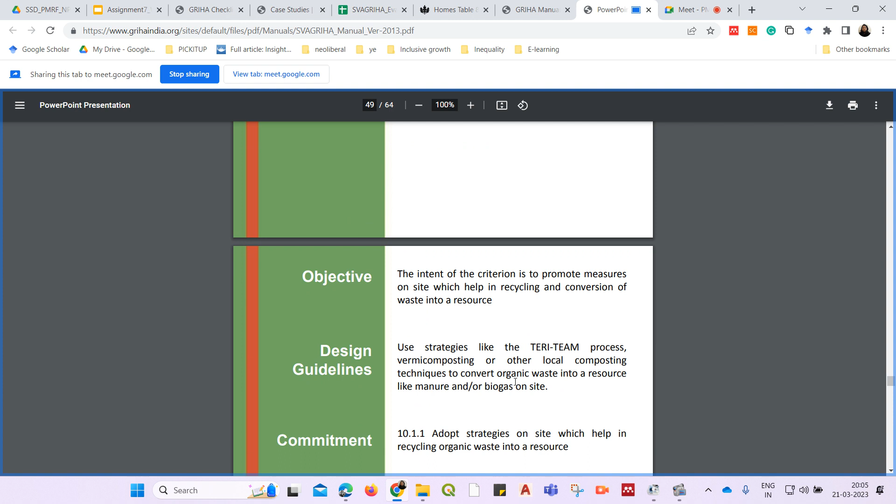For example, for different buildings, the manual provides how much LPCD you need for rainwater harvesting. And for generating something from waste, if you are converting organic waste into manure or biogas on site, this is not suitable for a residential building, but if you have a larger industrial or different kind of building, it can be possible. Or if you have vermicomposting - so we said yes, we have vermicomposting, and we awarded ourselves 2 points for that.

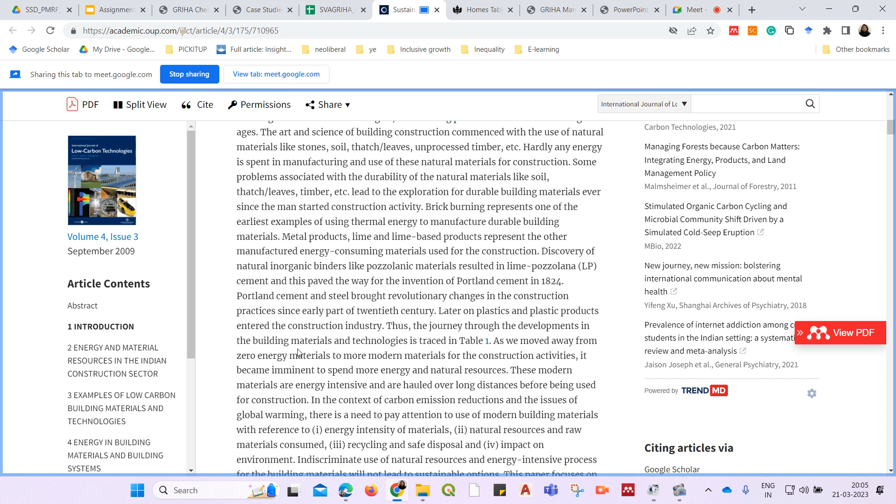Then it talks about reducing embodied energy of the building. I have provided a link for how embodied energy calculations are made for buildings. It largely focuses on low carbon buildings. Embodied energy focuses on total low carbon materials in the building, as you can see here.

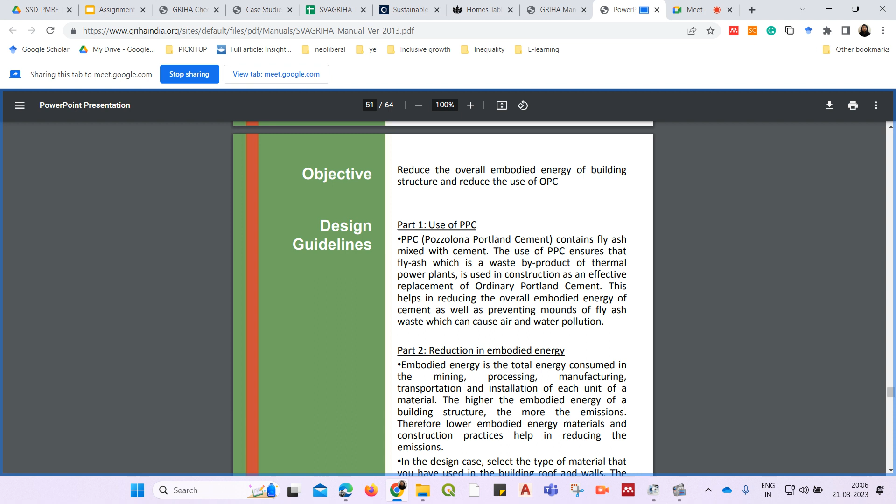You can see the calculation for reducing embodied energy. The first thing considered is that instead of using OPC, ordinary Portland cement, if you use PPC, Pozzolana Portland cement, made of fly ash mixed with cement, it is low carbon compared to ordinary Portland cement. If your building has that, you can award yourself 2 points. For the sake of this exercise, I'll say our building has been constructed with PPC instead of OPC, and we will award ourselves 2 points.

Then again you have to make calculations if you have used materials which reduce the embodied energy of your building compared to normal material. For example, here we used PPC instead of OPC, so we have reduced 100% of the embodied energy in terms of concrete, and we have given ourselves 2 points. You can do the same calculations for the wall panels, the slabs and things, as you can see here. So embodied energy for low energy slabs, or area remaining under the slabs, compare it against conventional RCC slabs, and compare conventional walls to low energy walling, and similar calculations you can make, to see how much embodied energy you are reducing in your building.

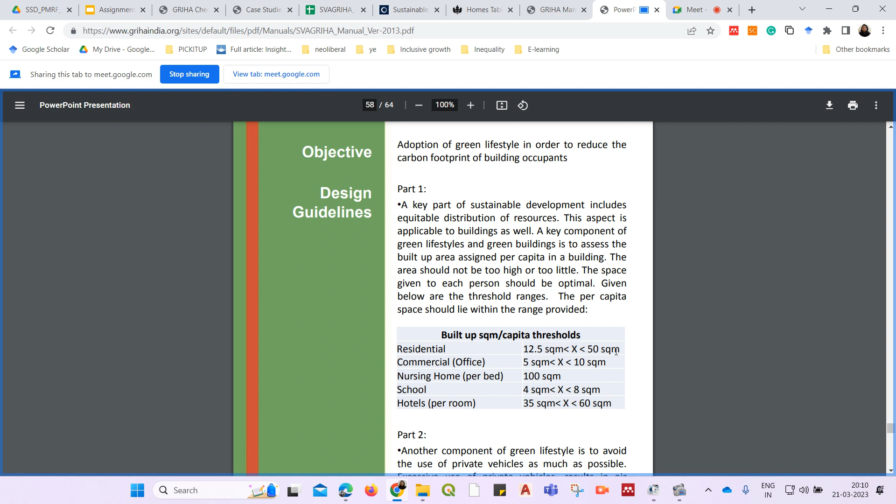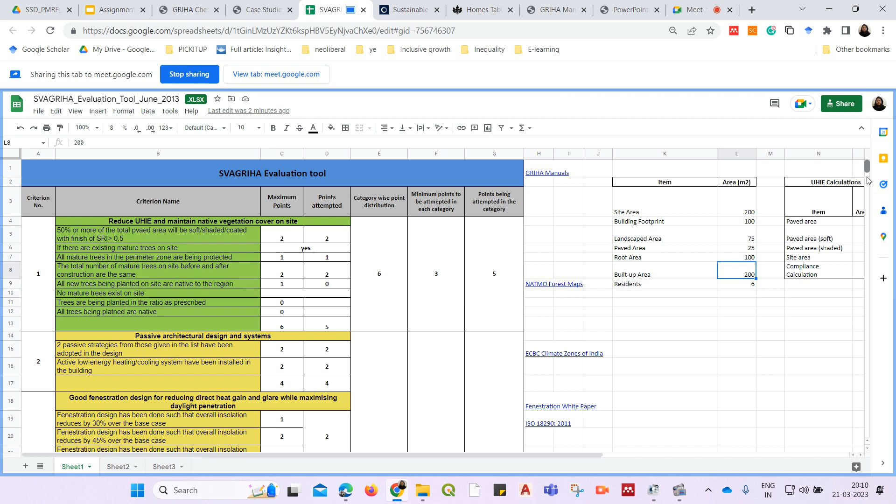Let's see our case. We have a total of 6 residents, and a total built up area of 200. So we'll divide our total built up by residents, which is 200 by 6. We get 33.33 square meters, which is less than 50 and more than 12.5. So yes, we qualify for the SVAGRIHA threshold, and we have an optimum per capita built up.

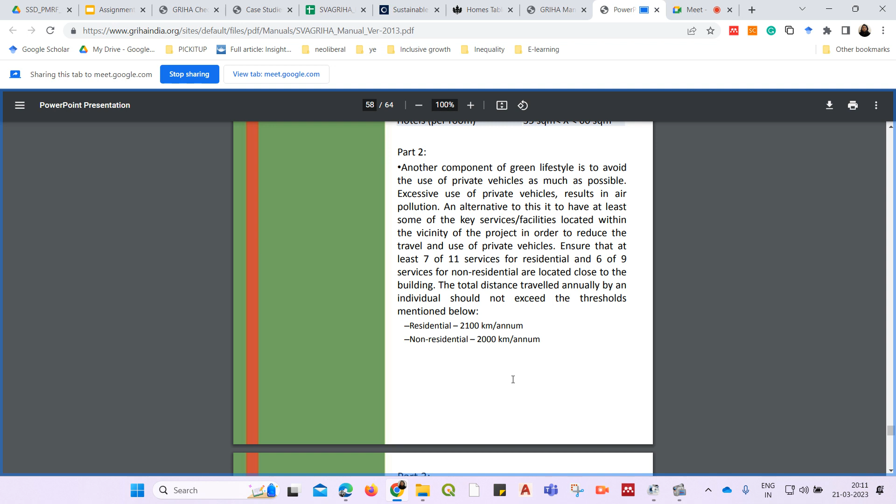Then there are things like, is your building located in an area that meets the expected distance for the SVAGRIHA threshold. If it is a residential area, 2100 kilometers per annum should be the amount you need to travel every day for accessing your basic resources. Based on where your building is located and where your most common amenities are, how much you need to travel to access different resources, you can award yourself points.

And then, have you provided a dedicated toilet and resting room for your service staff? Do you have organic farming or a kitchen garden in your project or not? Similarly, you can award yourself points based on that. Then there are 2 more points if innovative strategies are being employed, for which I'll award 0 because we have not provided any innovative strategies.

So seeing from all of this, we can see that our building has received 34 points based on all our calculations. So we can see our building can be certified as 2-star. It can be given a 2-star certification in terms of green buildings.

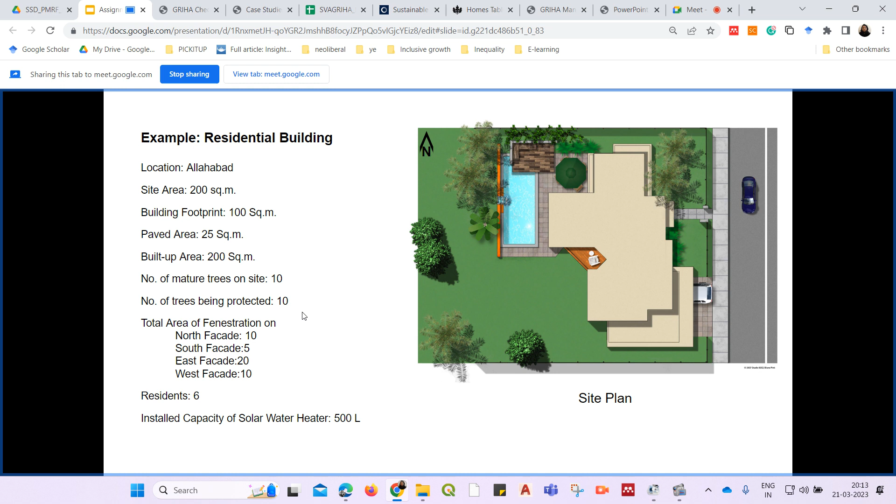I hope this is clear to you. All of this I'll share with you, and it will be available to you if you want to see it on your own and read further. All the links to different documents will also be shared with the PPT and Excel sheet. So if you want to read further and get to know more about all these calculations related to green buildings, you can access those as well. I hope that was clear. That is all for today's session.